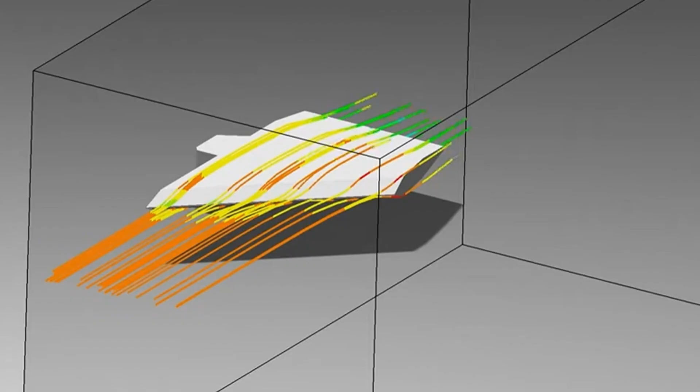In today's video, we will be covering the 3 fin sets in OpenRocket. These are trapezoidal, elliptical, and freeform. You can see here that we have a diagram of a fin. This diagram shows you the terminology of each angle and also length.

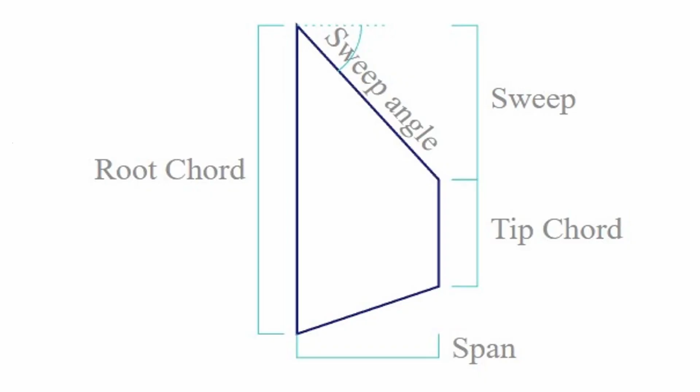First up, we have root chord. This is what touches the side of the rocket. Next, we've got sweep angle. This is the angle that the air hits the fin at. Next, we've got the tip chord. And after that, we finally have span, which in OpenRocket is called height.

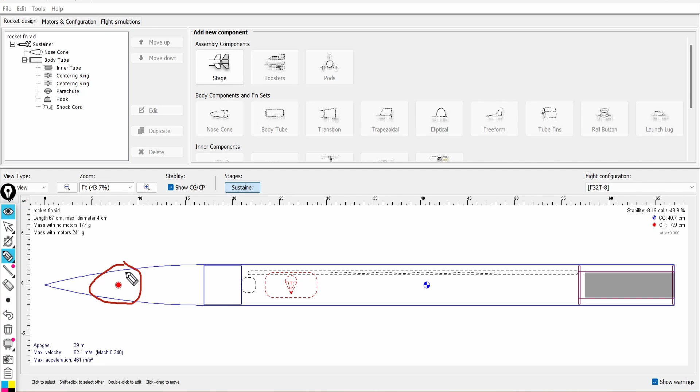Here I have a rocket with no fins. This rocket will be our example for the entire video. As this rocket has no fins, it will be very unsafe and you will not be allowed to launch it at all. As you can see, the center of pressure is a lot more forward than the center of gravity. This causes the rocket to go into negative stability. Therefore, we are going to need some fins.

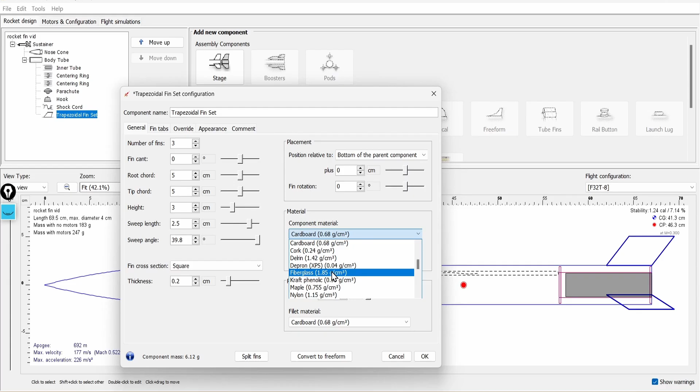I'll start off by adding trapezoidal fins. This is the first of 3. Now, I'll make sure to change the thickness to 0.2 and I'll change the material to fiberglass. This will be a standard throughout the video. Let's check the apogee now. It is at 687. Note that the stability is at 0.99 cal. This is way too low for a rocket.

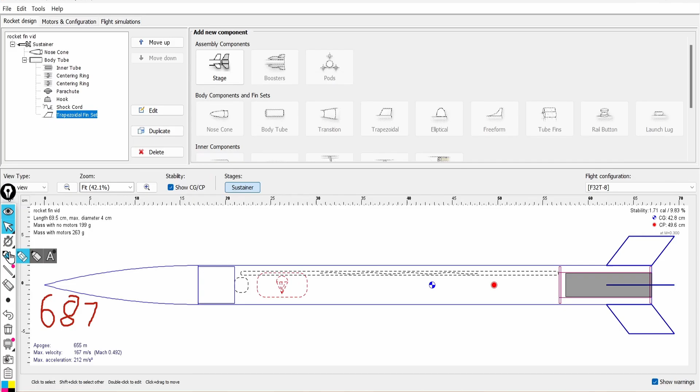Now let's add 4 fins. If we compare it to the apogee, we can see that the apogee has gone lower. This is good because the stability has gone up majorly. Just note, if you're looking for height records, you really want to be doing 3 fins. Even though the stability is good, let's revert back to 3 fins and see what we can do.

I'll start off by changing the root chord length. I've added 20% to the length of the fin along the surface of the rocket. Now let's compare the apogee and stability. Our apogee is close to the original 687 meters. However, the stability is still not even 1, which is not good enough. We have to be well above 1. Now let's revert the fins back to its original.

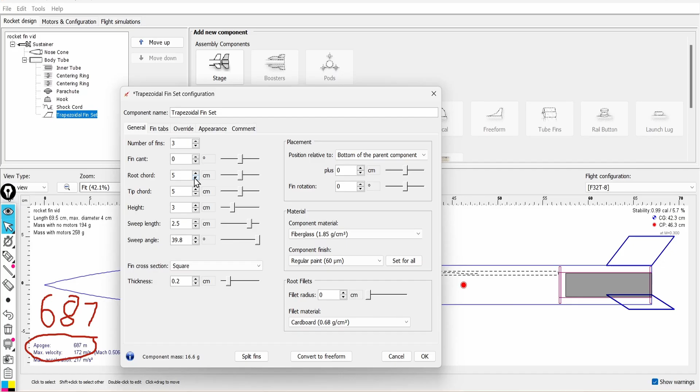This time I'm going to change the span, or in OpenRocket it's called height. I'll add 1 centimeter. Okay, now let's see what's happened to our apogee and stability. If we look at the apogee, we can see that we have lost about 40 meters. This trade-off is good, however, because the stability is very, very high. This can actually fly and be a stable rocket. The center of pressure is behind the center of gravity by at least a diameter.

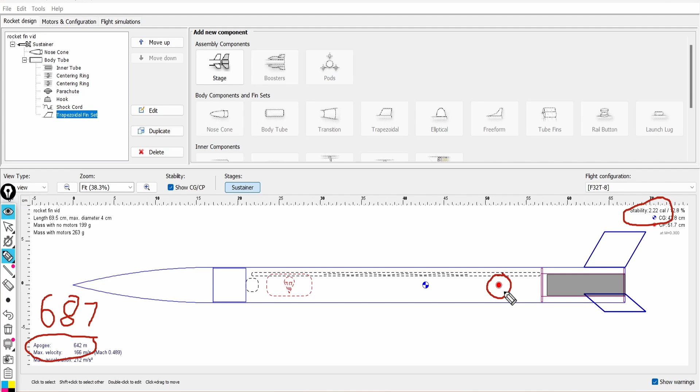Now let's alter the sweep angle. The sweep angle also changes the sweep length. Keep that in mind. I'll increase it a few degrees. As we can see, the apogee has gone up lots, almost reaching the original apogee at 687 meters. Also, the stability has only gone down 0.01. This is a good trade-off. We've also kept the fin height, so this is becoming quite an efficient rocket.

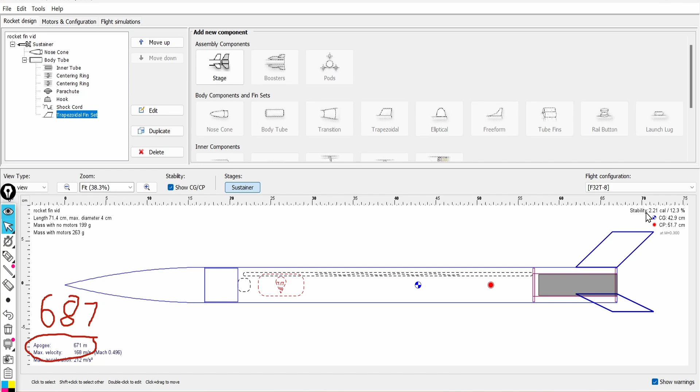One thing to note is that with a sharp sweep angle like this, it may be hard to make depending on what material you use. In summary, if you want more stability, you increase the height of the fin or span. And if you want apogee, you increase the sweep angle.

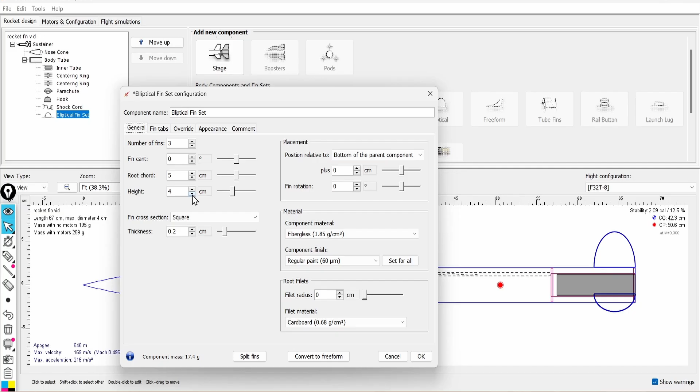Now let's move on to elliptical. Keep in mind that I have never actually built these fin shapes, but we will look at the theory of them. Now I'm going to revert it back to its correct material and thickness. I'll also change the height down to 4. Now we're back to our original state so we can make a comparison. Alright, let's check what we've got.

We can see that our apogee is at 646, which happens to be lower than trapezoidal, which was at 687. We can also see that the stability is 2.09. This is good. Let's do the same thing with our root chord and height for this set of fins. I'll start off by changing the root chord length to 6 centimeters. The apogee hasn't changed at all, and the stability has gone down. It is at 2, so it is still okay. However, usually I'd prefer to have more stability. Now let's revert the root chord length back to 5.

Let's change height up to 5 centimeters. Let's compare it now. We can see that the apogee is 612 meters. It has lost about 30 meters. This is okay. If we look at the stability, however, again it has gone up majorly. It's at 2.75, which is very, very good. In summary, this fin type is good because it keeps most of the apogee and has lots of stability, because its leading edge and trailing edge are curved. Keep in mind, however, that this fin type is very, very hard to manufacture.

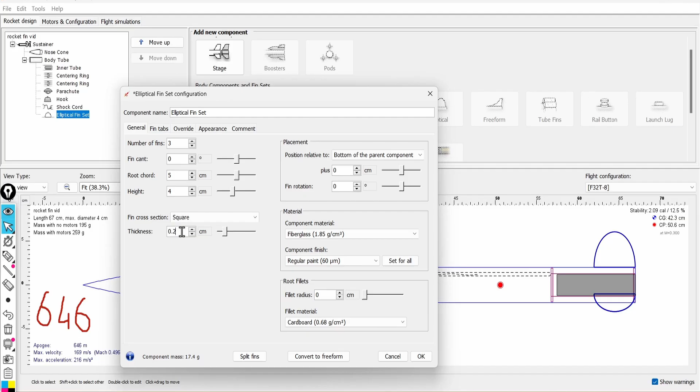Now let's try something new with the fins. First of all, I'm going to change the height back to 4. Let's try changing the thickness. I'll start off by making the thickness 0.3. We can see that the apogee has gone down lots. Also, the stability has gotten worse. This is not a good improvement. At 3 millimeters, the fins may be a bit too strong for this rocket. Let's see what happens when we go down to 1 millimeter thick.

We can see that the apogee has gone up significantly. However, it's up to you to determine if 1 millimeter thick is enough for a rocket. Now for fun, let's look at the placement of the fins in the rocket. I'll make sure to change the thickness back to 0.2.

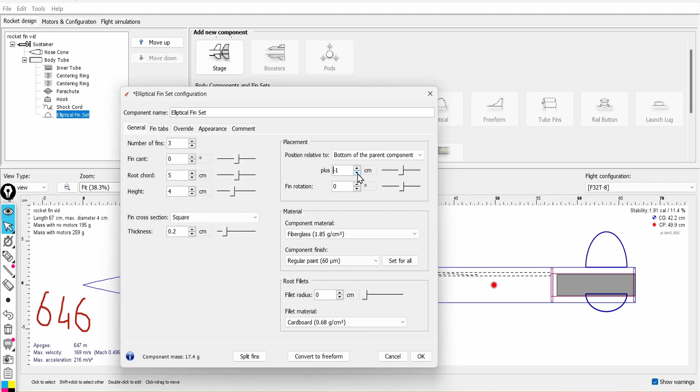Let's move the fins further up the rocket. I'll start off by changing it by 1 centimeter. We can see that the apogee has not made any difference. However, the stability has gone down. This is not a good improvement. Elliptical fins are more for fun and potentially not for performance rockets.

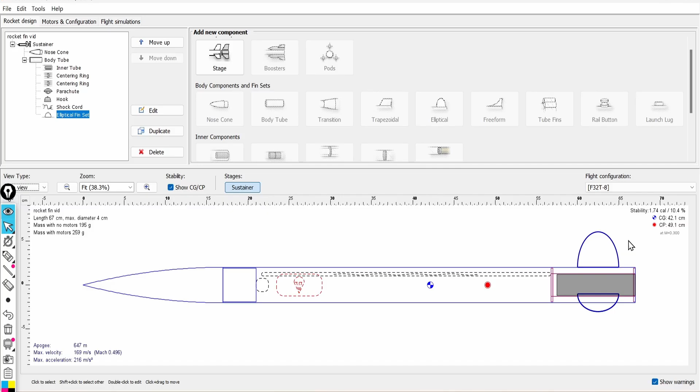Now let's move on to my third and favorite selection, Freeform Fins. Now let's set the fins up to the same specs as the other 2 fins. I'll start off by changing the material to fiberglass and the thickness to 0.2. Now we can move on to the shape tab. To make the fins the same, we've got to make the fin height 4. You can do this by dragging down these points.

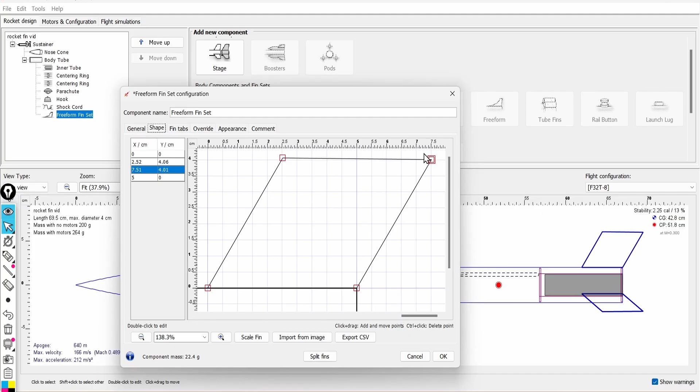Let's write down the apogee, which is 640 meters. Let's see if we can optimize these fins. I'll start off by bringing this in. Look, we already have 9 meters improvement on our apogee. The stability has also barely gone down.

From here, it's important to mention that we're actually going to need to glue these fins on. We have 2 options. The first option is filleting it. What this does is it adds a layer of glue besides the surface of the fin. We can find it here. Usually the fillet radius would be between 1 to 3 millimeters. I'll change the fillet radius to 2 millimeters.

Now, there is a fillet material, and I'll make that carbon fiber. This is what we use on our carbon fiber rockets. However, if you're using glue, you'll have to add a custom material.

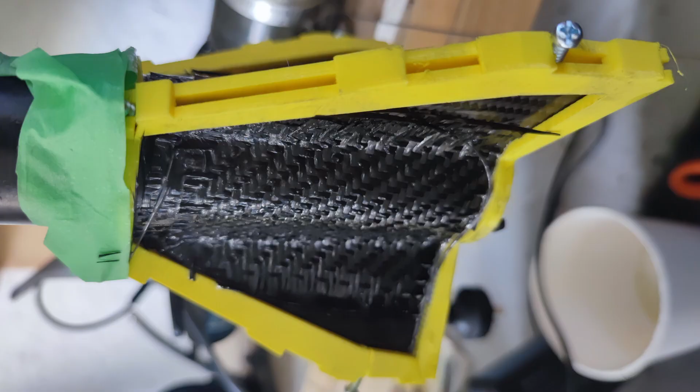Now I'll revert the fillet, and let's move on to the next form of gluing your fins on. It is through the wall fins. We can find it in fin tabs. We've got tab length, tab height, and tab position. I'll increase my tab height by 1 centimeter. As you can see in the diagram, it shows these tabs.

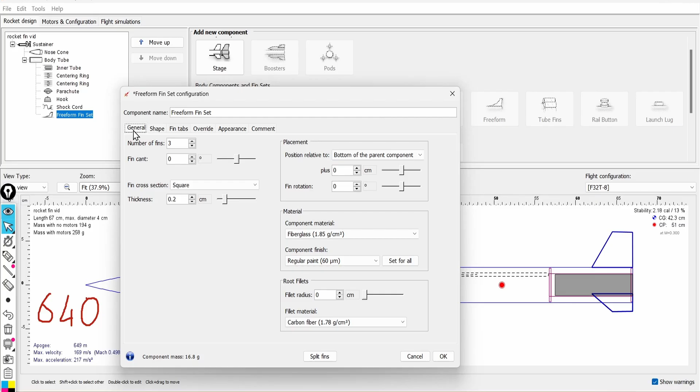Now I'll change it to 0.6. There we are. We can see that it fits the tube of the engine. Through the wall fins are always a much stronger option and should be used whenever possible. Again, I'll revert this back. For consistency, I'll leave the fillet radius at 0 centimeters. However, in real life, you're going to need to choose one of the gluing options.

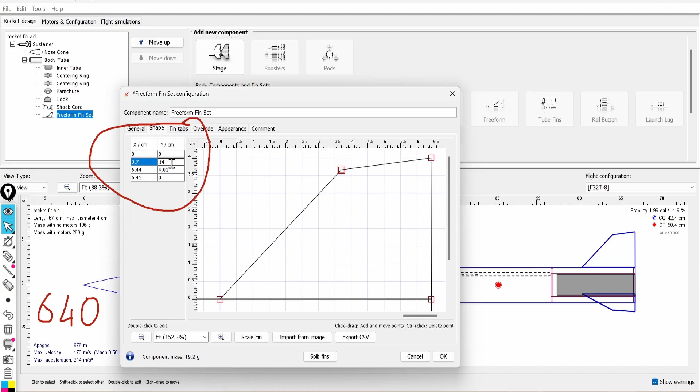Let's go to the main point of this video, which is optimizing the shape. Now I'm going to just drag a few points. You can click to add another point and control click to delete it. Another way to accurately place these points is using this X and Y chart. I'll make this 4, and I'll also make this 4. I have made the fin height exactly 4 centimeters. Now I'm going to change the X coordinates. We are still at 649 meters, so let's get into some optimization.

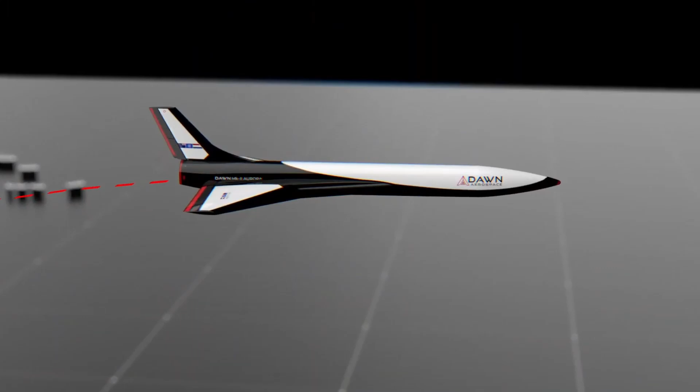Let's take a look at a rocket plane fin characterized by the Mark II Aurora by Dawn Aerospace. This fin is highly efficient, however it requires very high speed at all times. Alright, let's check our apogee. Look, we've got 707 meters. However, the stability is at 1.69, so I would make sure to add a bit more stability to this rocket.

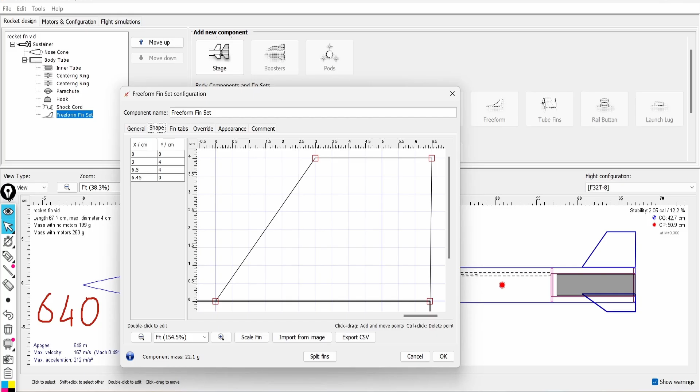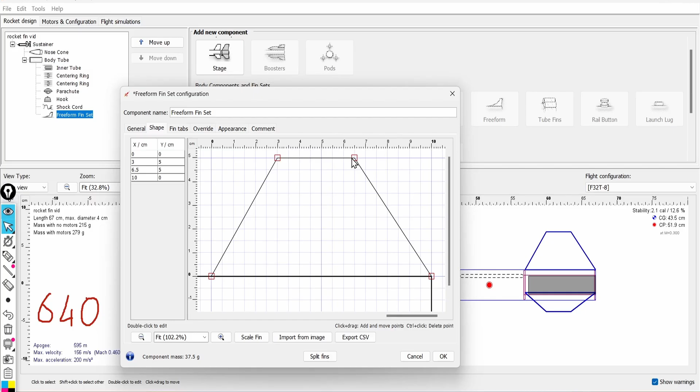Now we've made it to the most important part of the video. This encompasses 3 years of practical experience. This is our recommendation. Let's go. Step 1, let's get the span correct. I'll push this up to 5. Step 2, let's get a much longer root chord. I'll make sure to reset the offset. And step 3, I'll move the rear tip back. And step 4, let's give this fin a really good sweep.

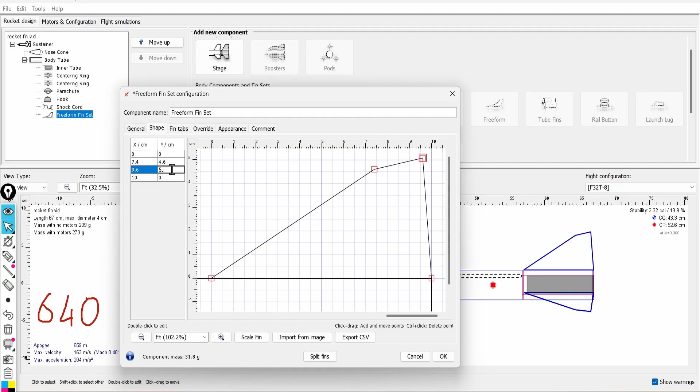The next 2 steps are our tricks. Now I'll move the outer leading edge in a bit. Our next trick is to slightly alter the trailing tip. Let's look at the apogee and stability. The apogee has gone to 659 meters, which is very good. The stability is around 2.3, which is a very nice balance.

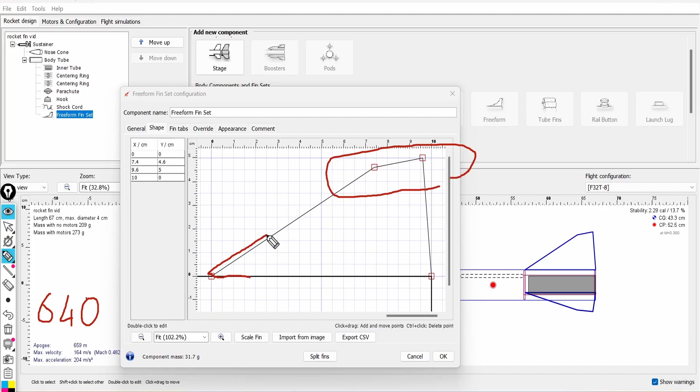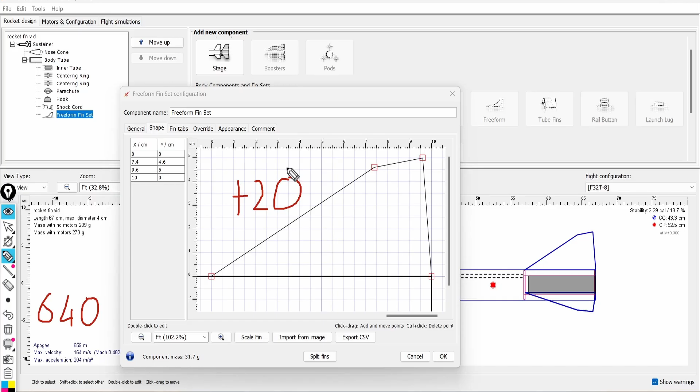The key here is to have enough height or span to keep the rocket stable and straight. But you have to have a sharp leading edge or sweep angle to make it fast and fly high. We believe that we've got the balance between stability and apogee right. The rocket has to get off the end of the rail without tilting. Here's a bonus tip. Generally, OpenRocket makes your fins too small. That's why you should always add 20% to your fin size. This is for the extra level of security to make sure that it will perform.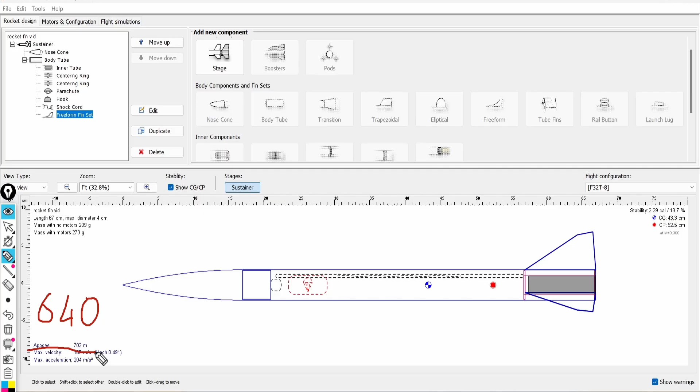For our final tip, let's round the fin leading edges and see the height difference. What a huge difference! That makes our rocket go so much higher. Check it out, we now have 702 meters. A point to note is if you're rounding your edges, never do it manually. This will ruin your entire rocket.